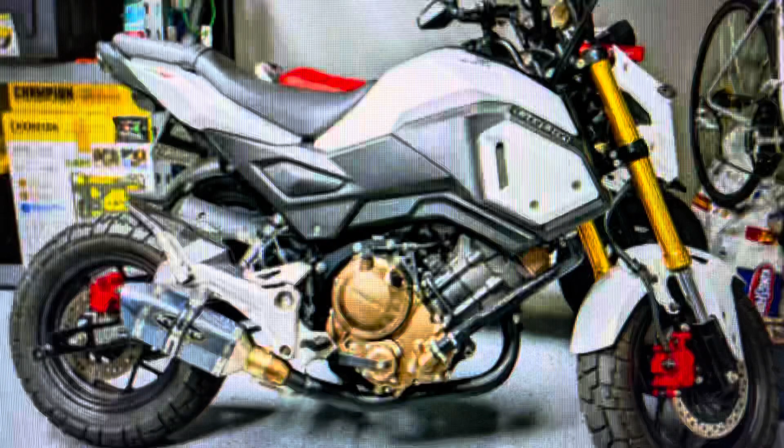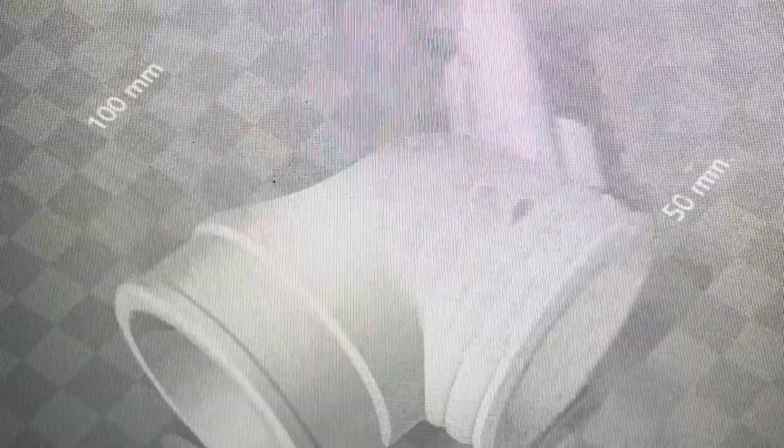For context, this is the bike that my customer is building. This was legitimately a customer who contacted me asking for an air intake for a Honda Grom conversion from the 125 motor to the 300 CBR motor. I found the STL file, changed it to one that would actually be printable for my printer, and away we went. Not bad for a first gig.

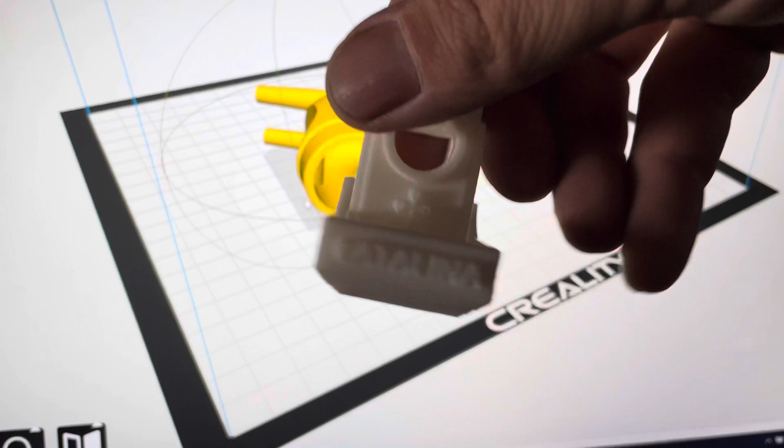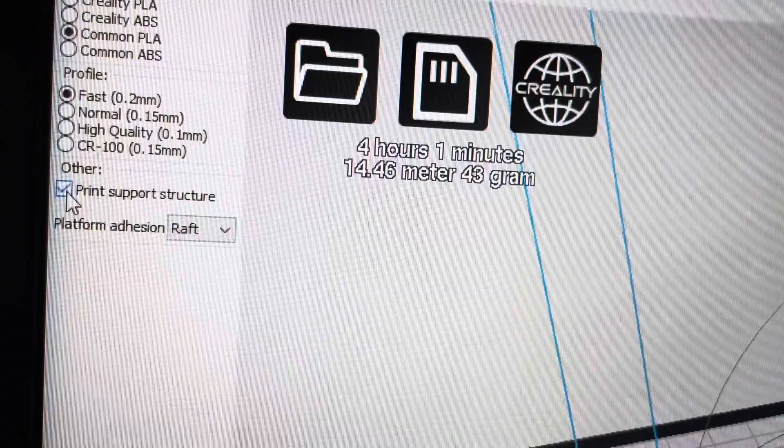This was a test print, and our settings are pretty simple. For this print, I have it set up for fast, and we can do higher quality stuff. I put support structure on. If I take it off, it'll change it to 3 hours, but I looked online and there are warnings if you don't. So it saves me 30 minutes, but it's not worth losing that entire print.

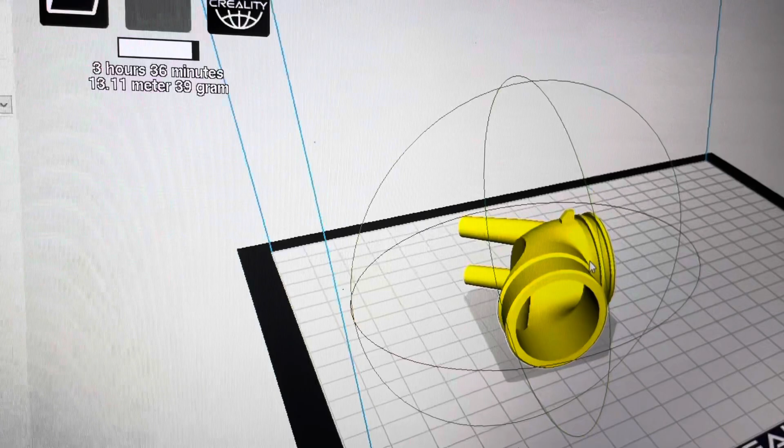So PLA is what I'm going to be printing in, and it's this common PLA, nothing too special. This is an elbow adapter for an air intake for the Honda Grom 300 conversion. So we're going to start printing this.

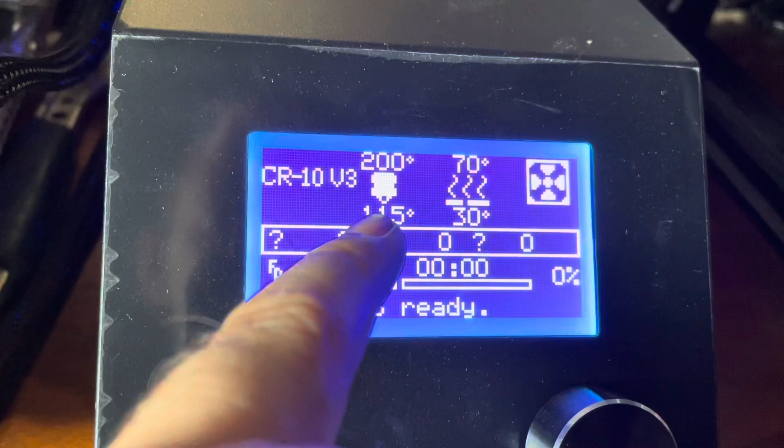So I'm currently preheating to 200 degrees. We are at 115 and climbing. 70 is the bed temperature, which is this guy here, and we are at 30 and climbing. So we're almost at temperature.

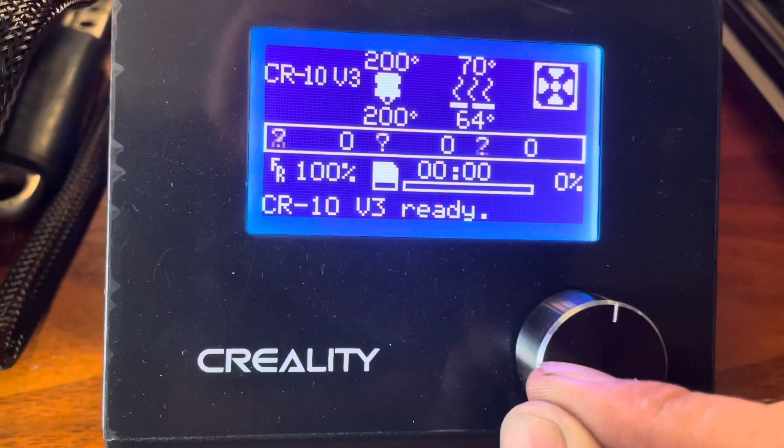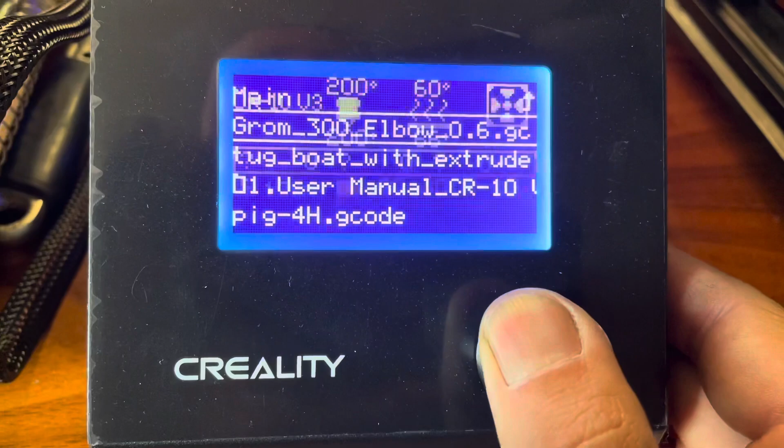The SD card is in, we're going to print from the TF card, and I changed it to the G code format. So we're just going to hit print, and it's going to start up.

And we'll check on it periodically. But basically what it's doing is building a raft for the cold air intake elbow for the Grom conversion from the 125 to 300 CBR. And we have this beauty, I'm going to put it in time-lapse.

Using a security camera to check on the 3D print is awesome. Mine's a Wyze pan-tilt zoom camera. It's only like a digital zoom, not an optical zoom, but it still gets the job done. This time I set it up for time-lapse because it has a memory card plugged into it. It's nothing special, it's 1080p, does what it needs to do, and I'm able to watch the 3D print in case there's some printer overrun, say the PLA, which is the plastic being used, gets stuck or knocks over the print. I'm able to see what's going on and fix it before the printer goes into full chaos mode and I walk into a giant pile of used up PLA, because I haven't learned yet how to reuse that stuff, if it's even possible.

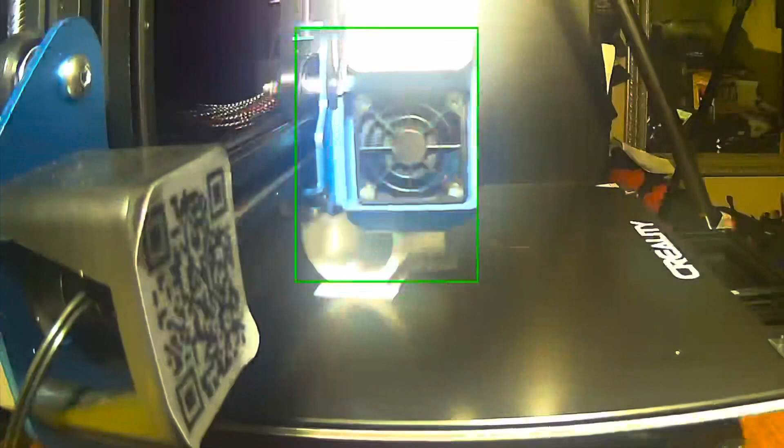That's something to look forward to in the future, if I learn how to recycle any filament material back into projects. If that's the case, I may or may not need a plastic grinder to get it all down. Then I have to melt it and extrude it into filament itself to be able to reuse it. And then the question is, is it 100% recyclable, or do I have to add extra material to have it work again?

So what we're doing here is building an air intake for a Honda Grom conversion to a 300 CBR Honda motor. In doing so, you're going to need to add a space for the sensor, and there's all sorts of sensors. Basically, they measure air coming in, and they dictate the amount of fuel mixture to run the engine properly.

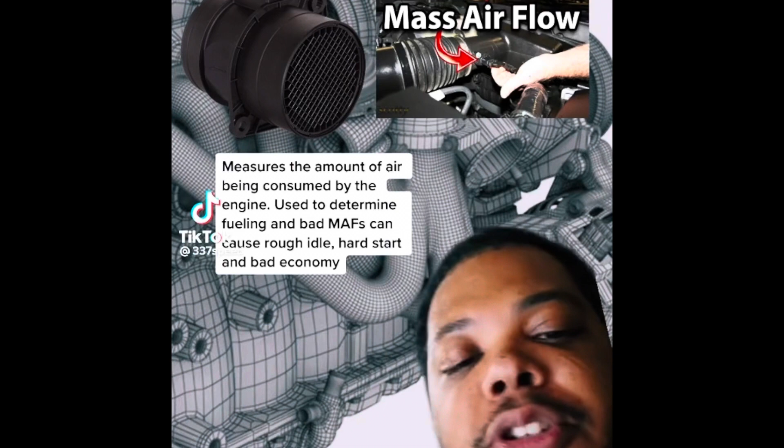I found a video about this: engine sensors and what they mean. This might get very confusing. First is the mass airflow sensor. You'll see this between the airbox and the throttle body. What this sensor does is measure the amount of air going inside the engine, and is used to calculate the fuel that needs to be burned for that air.

That sensor has either a hot wire or a hot film that, as air passes over it, there's a cooling effect, and the ECU knows how much fuel the engine needs at that time. If you have a bad mass airflow sensor, you'll typically have a hard start, it'll run very rough, and you'll get poor gas mileage. So if you have any of those issues, look at your mass airflow sensor and pull your codes.

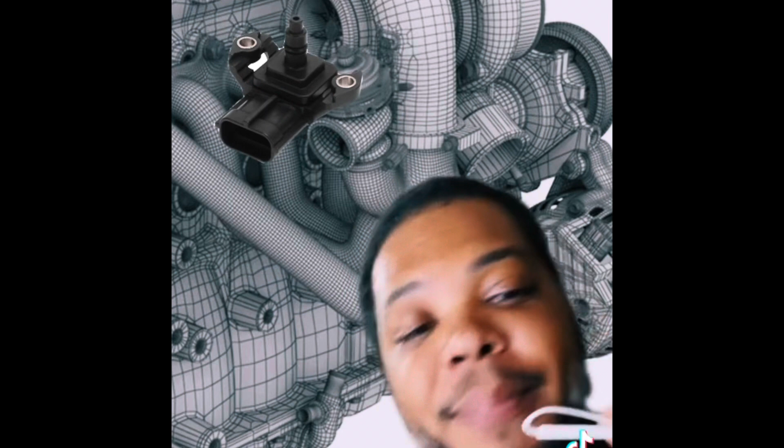Next is the MAP sensor, manifold absolute pressure. If you're at sea level, you're at atmospheric pressure of 14.7. With a manifold absolute pressure sensor, it's going to read the amount of pressure in the manifold from absolute zero vacuum all the way up to whatever it's reading. For example, if it's reading 20 PSI on your MAP sensor, you're making right around 6 pounds of boost. I checked the math, it's 5.3.

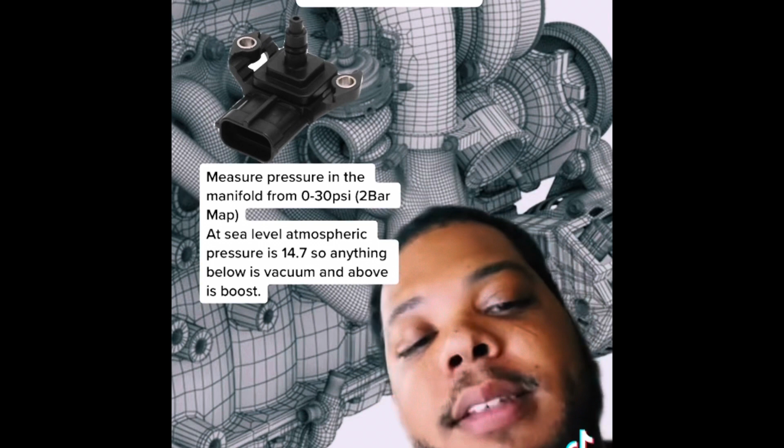A bad MAP sensor is usually going to throw a code, and the engine symptoms are kind of similar to a bad MAF. It's going to run rough, bad gas mileage, not really getting the right signal to the engine. But these are much cheaper to replace than a MAF sensor.

IAT, or intake air temperature sensors, measure the temperature of the air going inside the engine. Cooler air mandates more fuel because it's more dense with air molecules, while hotter air is less dense. At the same time, hotter air is more prone to pre-ignition, so this is a sensor that's very important to the longevity of your engine.

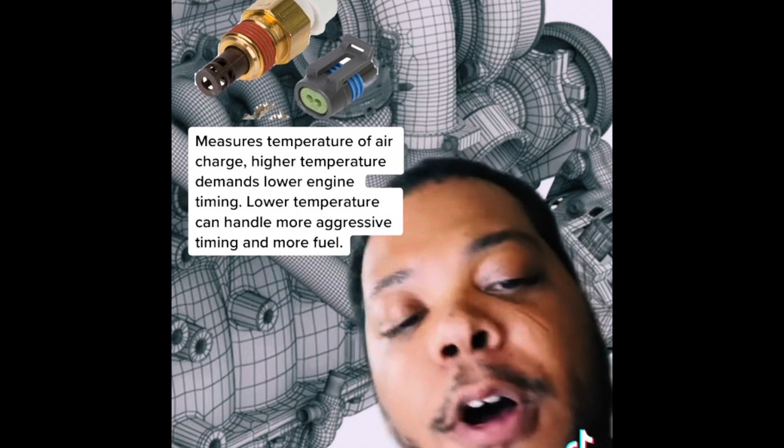Usually with bad IAT sensors, you're going to have an engine that runs very rough. It's also going to run very rich because it probably defaults into thinking it's always cold, and then it's always going to be adding more fuel than it really needs.

So guys, the 3D printed intake for the 2015 125 Grom has completed, for the engine conversion to a 300 CBR motor, and it is 2:15 in the morning. The print says it's going to take 4 hours and 1 minute... 4 hours, 1 minute. It actually took 5 hours, 11 minutes, and 47 seconds. Interesting.

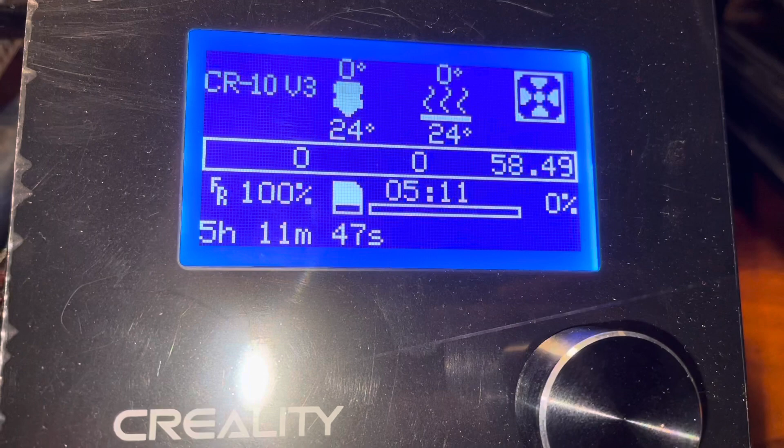Still, pretty cool. I did a little time lapse with my security camera, you know, the Wyze there, so hopefully that turned out. But I woke up, I didn't set an alarm or anything like that, so it wasn't too big of a deal.

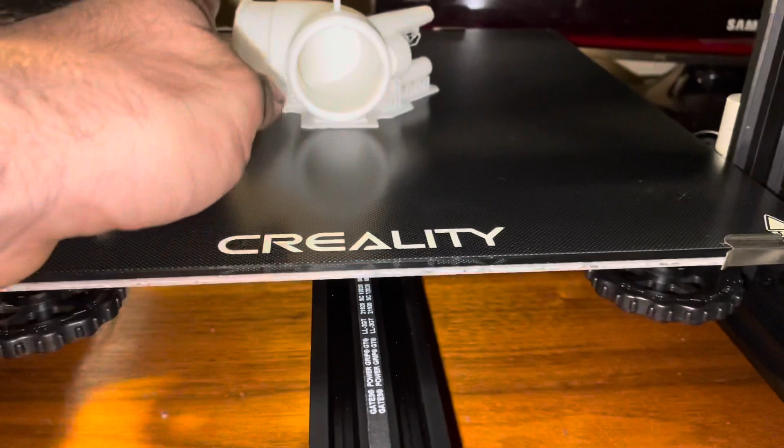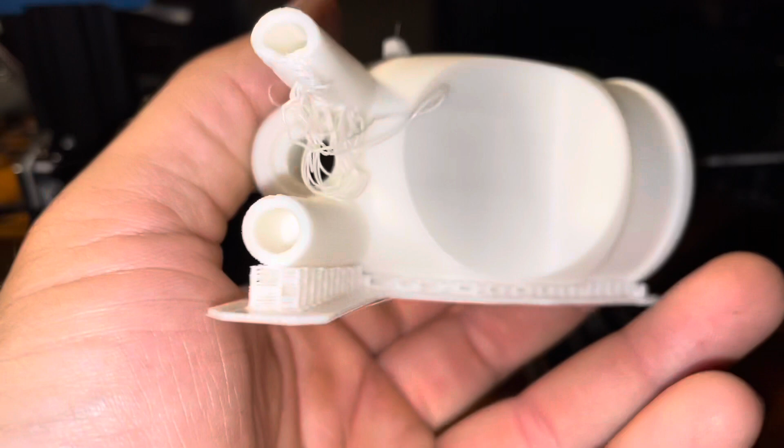Let's see, can this pop off? Yep, there we go. Okay, so this was a pass because it had the structure, but this was a fail. I can see why. I was surprised it didn't give it support structure here to support this, to make it perfect. It did all the structure for the bottom here.

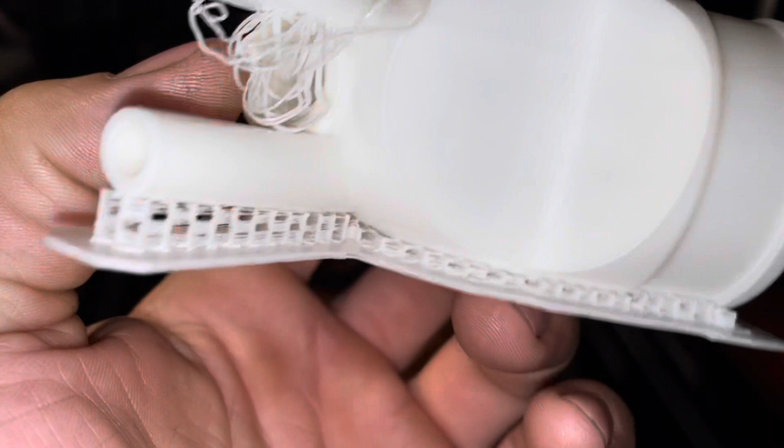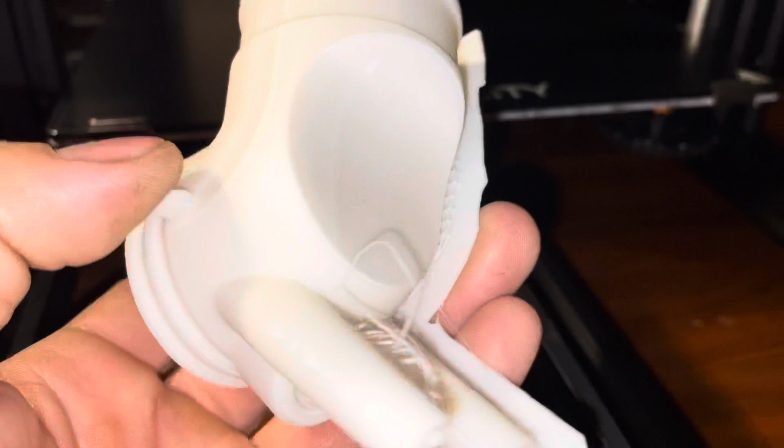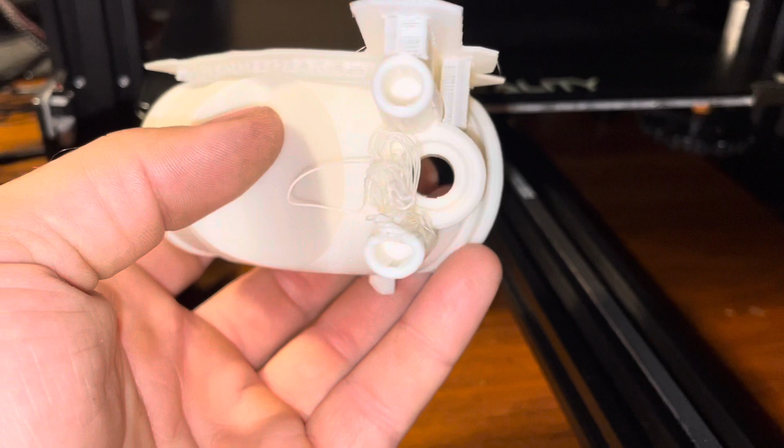Interesting. Everything else turned out really well. I'll send pictures to the customer and see if they still want it, because to me this area isn't that bad. I'd just use a little bit of epoxy and finish that off. But yeah, she turned out okay.

I'm going to have to get him to send pictures of the modification. I've got them already, but I'm going to get some pictures from the bike and I'll post those later. All in all, the quality is pretty good.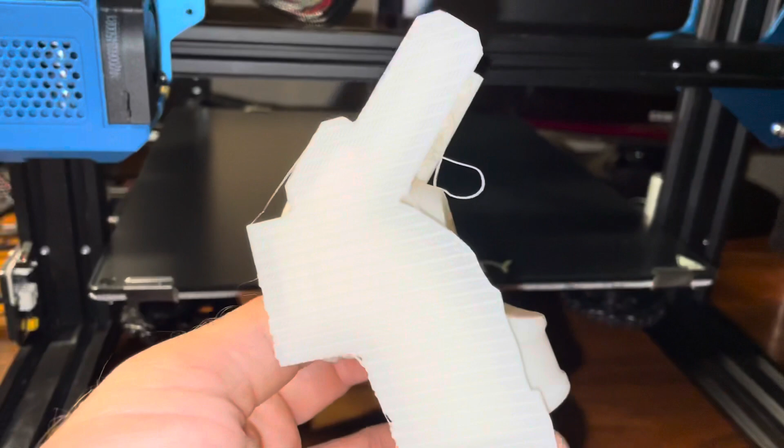So guys, I can now print parts for automotive. This was suggested to be printed out of PLA, but I would prefer to print it out of ABS. This here is for what I believe to be either the injector or the mass airflow sensor, for the bike to understand what the air temperature is. It's one or the other - online it says injector, but I think it's probably the mass airflow sensor.